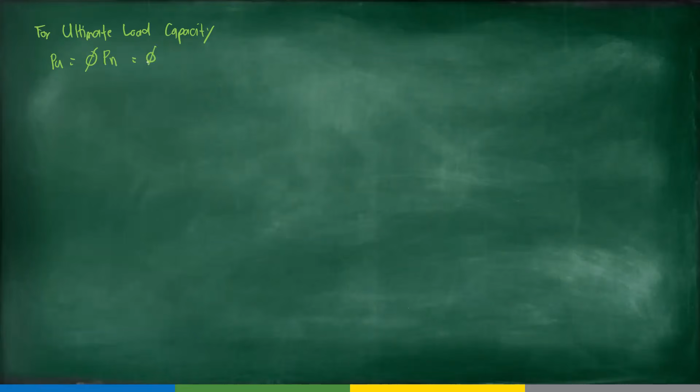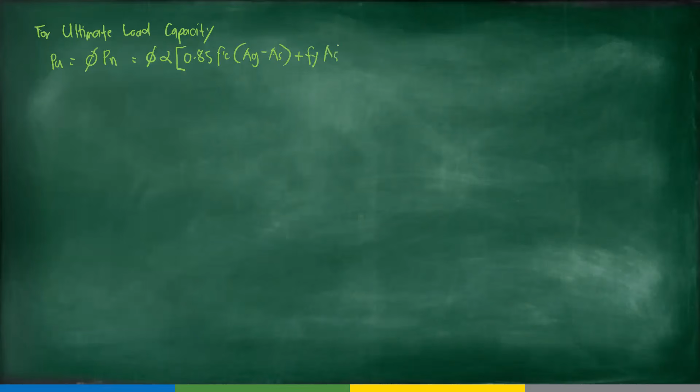Okay, the next, kung meron tayong nominal, pwede rin natin ngayon makuha yung ating ultimate load capacity. So for our ultimate load capacity, di ba yung ultimate natin is just phi multiplied by nominal. Ano ngayon yung phi natin dito? I-multiply lang ulit, i-substitute lang ulit natin yung nominal load natin. So phi multiplied by alpha yun kanina, that is 0.85 F prime C (Ag minus As) plus FyAs. This will now be our formula for ultimate.

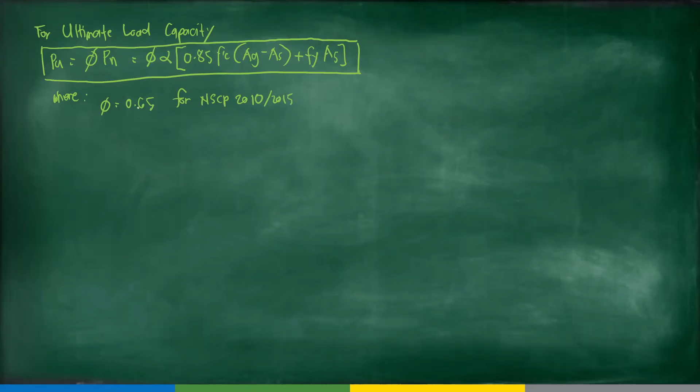Where yung phi natin ngayon will be equivalent to 0.65. Diba ang mapapansin niyo guys doon sa ating beam, kapag tension controlled yun ay 0.9, kapag compression controlled yun ay 0.65. So yung mga forces natin dito sa column considered to be compressive in nature. Ibig sabihin ang mag-govern ngayon dito ay compression controlled siya. Okay, so yung phi natin dito ay 0.65 for NSCP 2010 or 2015, or 0.70 naman for NSCP 2001. These are for tied columns.

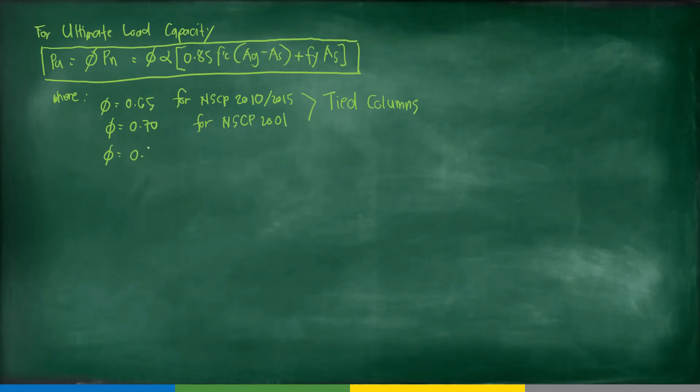Yung phi naman natin ay equivalent to 0.75 for NSCP 2001, 2010, and 2015 for spiral columns.

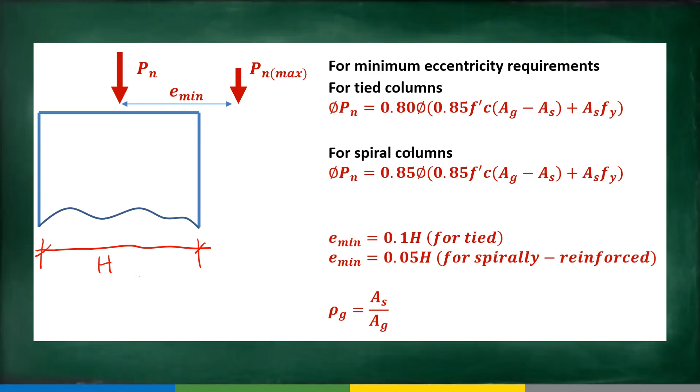So for our spiral reinforcement, meron tayong pwede nating masolve ngayon yung ating spacing of spiral reinforcement. Para masolve natin yun, meron tayong formula na rho S that is equivalent to volume of spiral divided by volume of core.

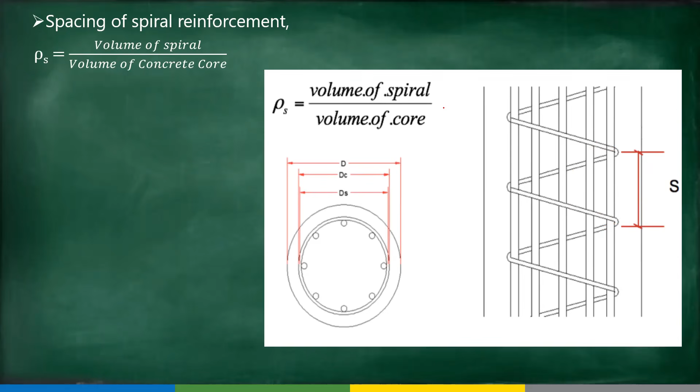Ano yung tinatawag nating volume of spiral? Let's say for example, ito yung ating spiral. Ang kinukonsider lang natin dyan ay from center to center ng ating spiral. So let's say ito yung center to center, yun yung tinatawag nating S. Kung gusto nating malaman yung volume of spiral, mag-consider tayo ng isang ganyan.

Kunin natin yung volume na na-cater nito. Ito yung spiral natin, so kung titingnan natin sa ating top view, that is considered to be parang circle. Yun yung ating spiral, at yun yung kakailanganin nating malaman mamaya, yung volume of spiral.

Ang susunod, yung volume of core naman, yung core na tinatawag natin dito, if this is our cross section ng ating column, yung ating diameter ng column ay ito, hanggang dito. And meron tayong tinatawag na diameter of core.

Ano yung core na tinatawag natin? Yung core is just the distance, kapag diameter ang pinag-uusapan natin, sa outer ng ating spiral shear reinforcement. So ito yon, at doon din naman, ganito yun guys.

So if this is our column, let's say, exage ko na lang guys para mas maintindihan ninyo. Let's say ganyan, yung tinatawag nating core ay ito. Kung gusto nating malaman ngayon yung diameter ng core natin, if this is our diameter of column, di-minus na lang natin ito. Ito yung ating diameter of core.

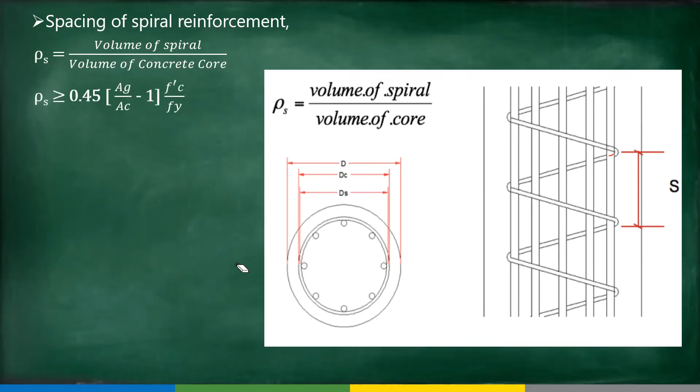But before that, meron tayong minimum na spiral reinforcement ratio, which is equivalent to 0.45 AG over AC minus 1, multiplied by F prime C over FY. Yung AG natin ay area gross, at yung AC ay yung area ng ating core, yung sinabi ko kanina. Yung area ng ating core ay pi over 4 DC squared na lang yun.

Then yung F prime C, and take note guys, FYT ito, or FY mismo ng spiral steel reinforcement, yung shear reinforcement nito. Let's say meron tayong FY at FYT, o sometimes FYH ito for hoop or for ties. Ibig sabihin, yung FY na tinutukoy niya dito ay for ties.

So paano natin makukuha to? Meron tayong given na formula na rho S that is equivalent to AS pi DC minus DB divided by pi over 4 DC squared multiplied by S.

Okay, dun muna tayo sa volume ng ating spiral. Paano tayo nagkaroon ng ganito? Itapos na lang pala natin to. So kung i-cross multiply natin to, we can say that the spacing is equivalent to this formula.

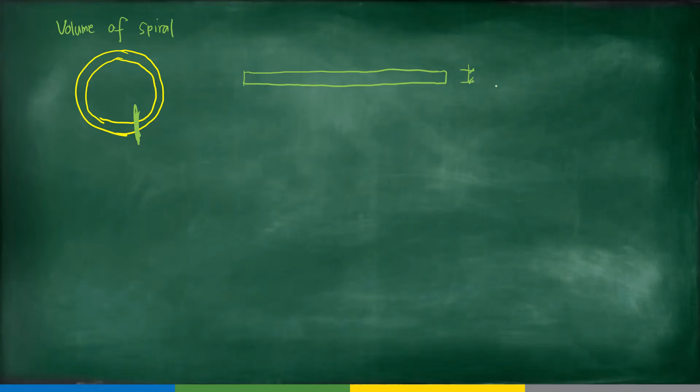Di ba ito na ngayon yung ating steel reinforcement for ties? Ito ngayon yung ating height, it is the diameter of our ties, DT tawagin na lang natin yan. At ano naman yung ating base? Ilan naman to?

Mapapansin nyo ba, itong total length na to is yung nakapalibot dito mismo sa ating circle? Kung nilatag natin siya as ganito, ang tawag natin dito is length, or that is actually the perimeter of our circle. Pero ang tawag natin sa ating circle, ang katumbas ng perimeter, yun yung circumference. Ano nang maalala nyo sa circumference ng circle in terms of diameter? Circumference ng circle in terms of diameter, that is equivalent to pi multiplied by d. So gamitin natin yon.

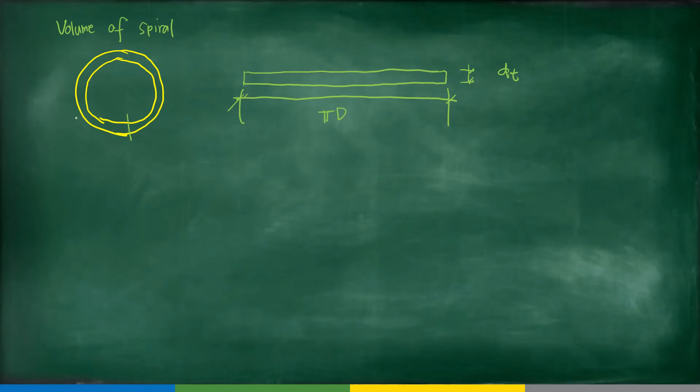So ito ngayon yung ating pi d. Ito yung kakailanganin nating diameter, ito ngayon yung ating DC na tinatawag. Sa gitna pala dapat to, ito yung kailangan natin. This is our diameter of spiral. Hindi ba itong nasa labas natin kanina, ito yung ating diameter ng core.

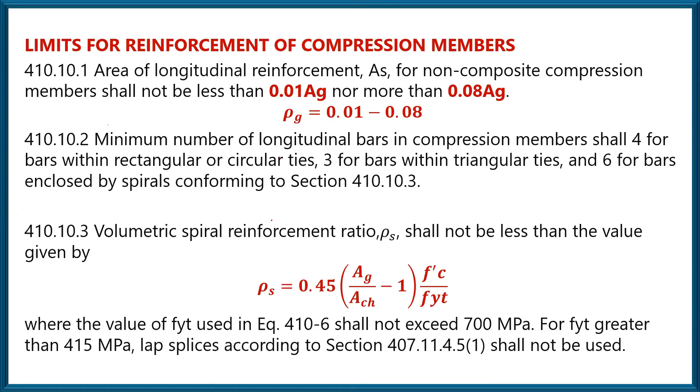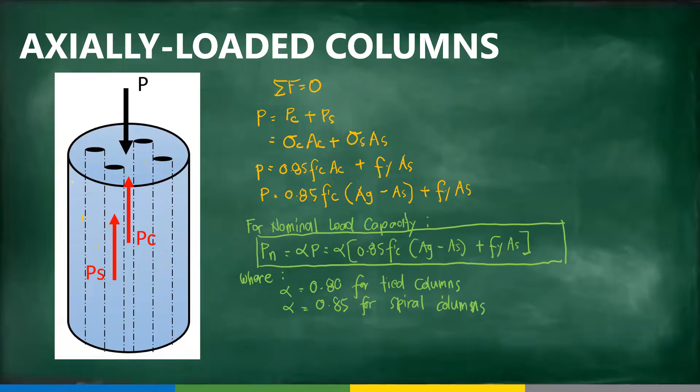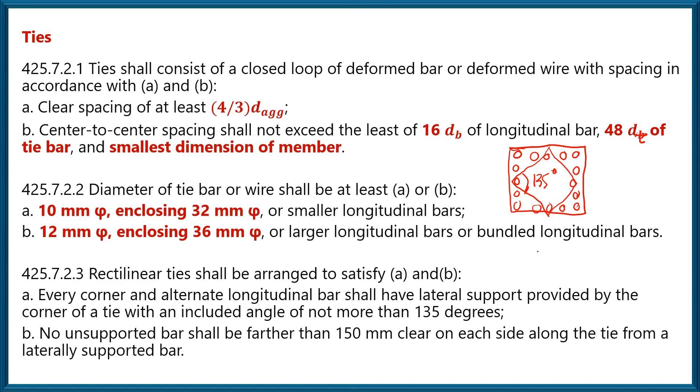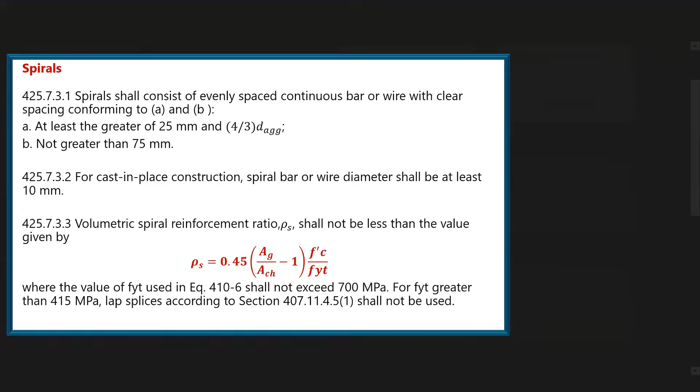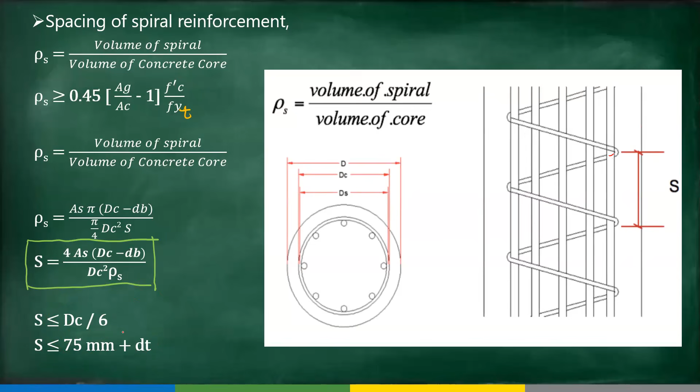As we said earlier, we have a maximum which is DC over 6, or sometimes what governs is 75 plus DT. So if that was minimum, this now becomes our maximum earlier - not greater than 75 mm.

So we check if the spacing of our spiral ties that we solve falls between the minimum and maximum. For cast in place construction, spiral bar or wire diameter shall be at least 10 mm. This is what we studied earlier, the volumetric spiral reinforcement ratio.

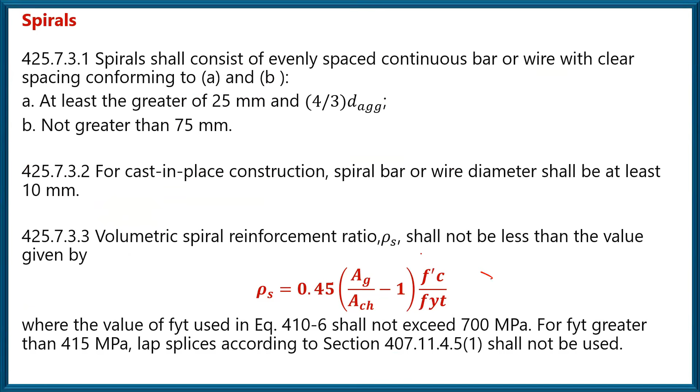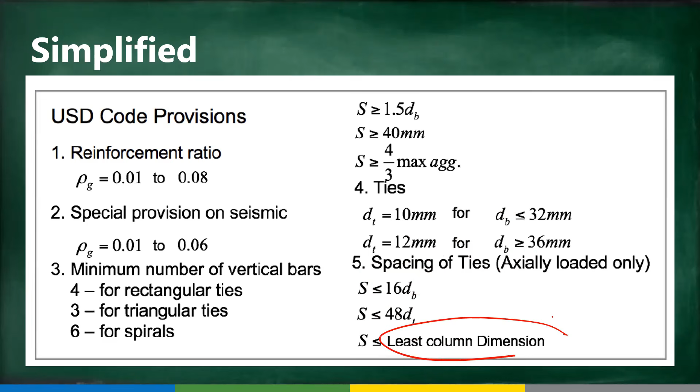First, 16 multiplied by diameter of our bar - that's what we had earlier. That is 48 multiplied by DT, and our least column dimension. Whichever gives the lowest value among those, that becomes our spacing.